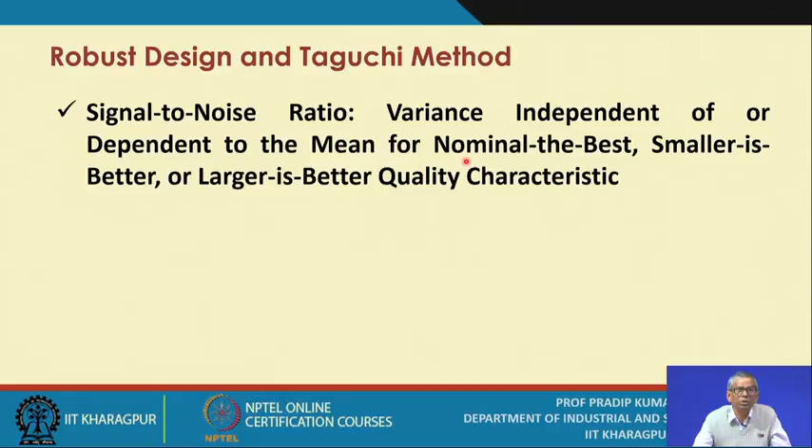Before I discuss signal to noise ratio, let me refer to tolerance design and tolerancing. If you remember, in the last lecture sessions we were referring to customer tolerance as well as manufacturing tolerance. Whenever we talk about the Taguchi method, there are three steps: the first is system design, the next is parameter design, and the last is tolerance design.

So we will just highlight certain important aspects related to tolerance design and tolerancing. It is important for the designer to establish the optimal values of a product's parameters and their tolerances, besides the product's performance, appearance and reliability.

In simple and plain terms, suppose you identify a parameter called, say, the spindle speed related to a machining operation. Given that particular component, its quality characteristics, its material properties, and all, I say that the target value of the spindle speed should be 500 RPM. But this is just a point estimate. So it is always better that you also specify the tolerances against the nominal value.

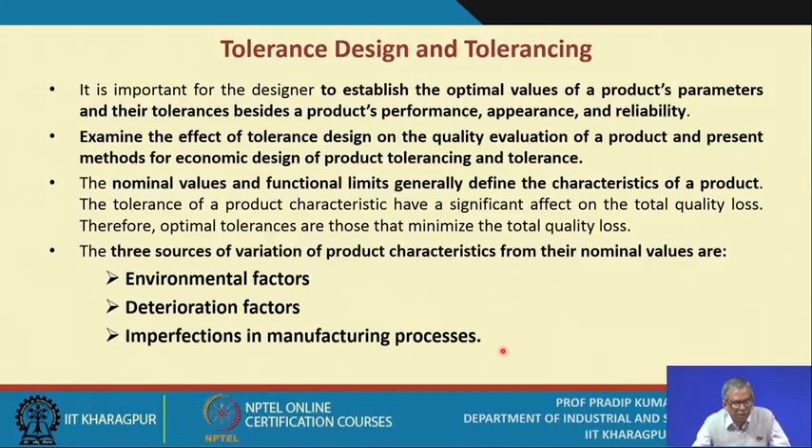Now, product designers address the first two causes of variation by considering the parameter design and the tolerance design. The production and manufacturing people address the third cause of variation, the variations due to manufacturing process imperfections. So the responsibility is assigned against these three kinds of sources of variations.

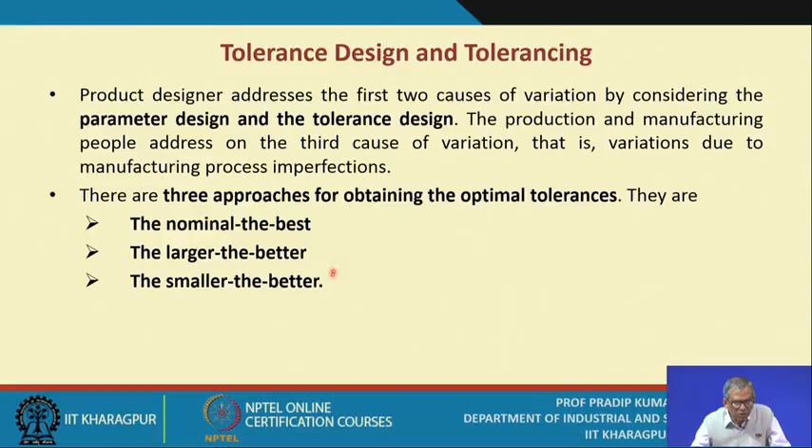Now, there are three approaches for obtaining the optimal tolerances against all these three types of quality characteristics. The first one is the nominal is the best.

In this type of tolerance, the nominal measurement of product characteristics such as dimensions and viscosity are examples. These are considered and the variation is reduced to a minimum.

The larger the better is applicable to product characteristics such as the hardness of materials, fuel efficiency and thermal properties of materials. These are three examples. The product designer and manufacturer aim for the larger value of the characteristics, as high as possible.

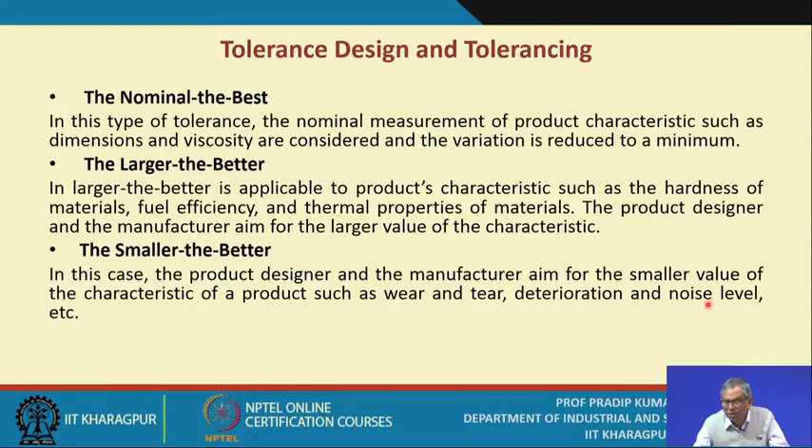Similarly, the third case, the smaller the better, the product designer and manufacturer aim for the smaller values of the characteristics of a product such as wear and tear, deterioration and noise level, etc. These are the examples.

When you deal with multiple components, this is a very special case. Here the objective is to confine the output characteristics of the product consisting of k components to the functional limit. As I have already told you during our discussions on reliability, most products have n number of components, and while you design a product, you first determine the number of components, the types of components.

And as well as the configuration. So supposing there are k number of components, the tolerance designed for each of these k components is required, since the tolerances of the components have a direct effect on the quality characteristics of the product or the processes.

So the desired characteristics of the product y with functional limit delta can be written as y equals to m0, that is the nominal value, plus c into x minus m. So m is the nominal value, x is the characteristics and c is a constant. So this is the equation.

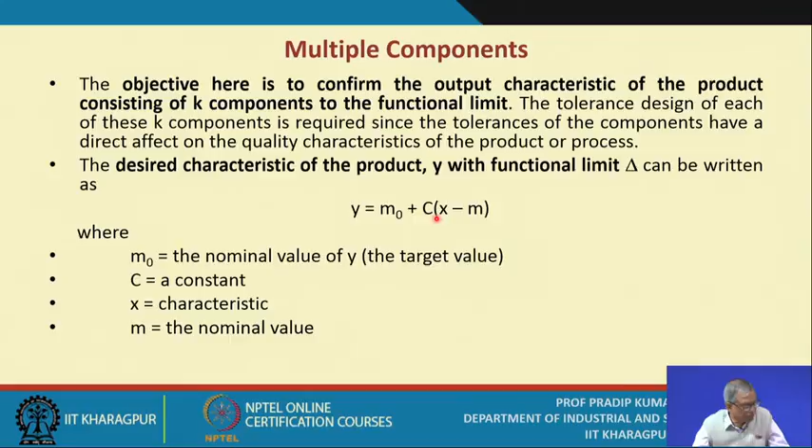Now the functional limits are m0 plus minus delta. So the loss function is computed like this. And the price of the component with characteristics x is equal to Ly. So this is basically the loss, meaning which price you are going to pay.

Therefore this loss equals A0, the proportionality constant, into c into x minus m square, and ultimately you get an expression for x like this. You can derive these expressions, no problem, which gives the optimal tolerance specifications for the component characteristics x.

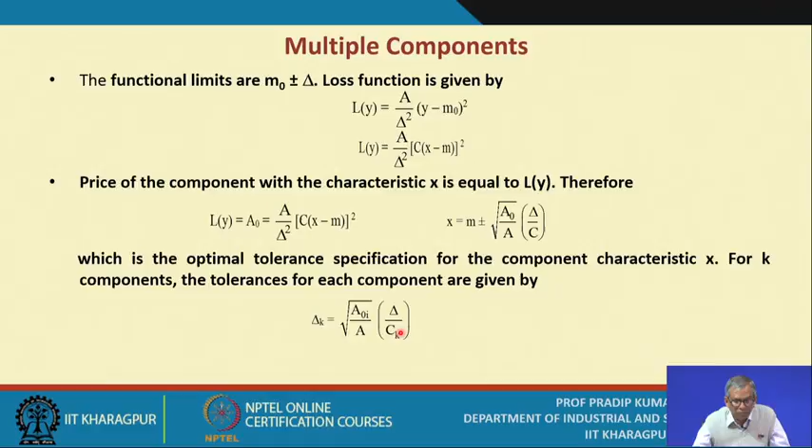For k components, the tolerances for each component are given by delta k equals to root over A0I divided by capital A, into capital delta by c k. So this is a generalized formula for capital delta k.

So when xi equals to mi plus delta i, assuming ci delta i represents the contribution to the displacement y caused by the quality characteristics xi, the overall tolerance delta can be computed as follows. You just follow these steps, the delta square expression is known to you, and you substitute all these values, and ultimately you simplify this expression.

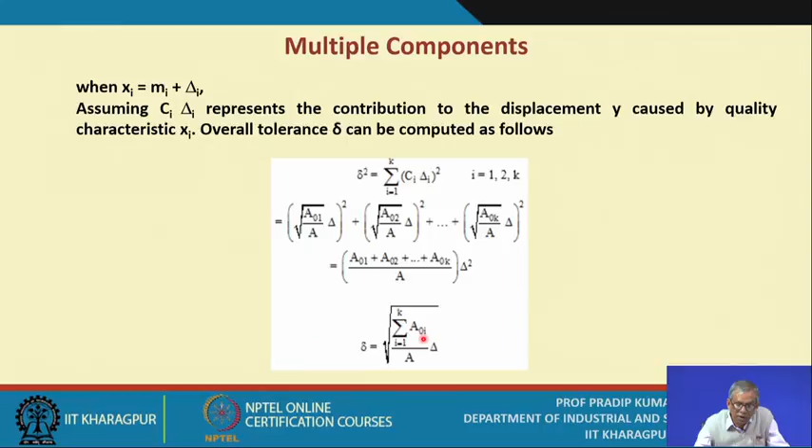And ultimately the expression for small delta is this one, that means root over sigma i equals 1 to k, A0i divided by capital A into capital delta.

So if you have multiple components, if sigma i equals 1 to k of A0i is less than or equal to A, then delta, obviously there could be different conditions. So small delta is less than or equal to capital delta.

This is basically when you refer to the manufacturing tolerance, so you make sure that the small delta is significantly less than the capital delta.

Then small delta equals capital delta. So what is the value of x? X is m plus or minus this one, into capital delta divided by small c. Now this expression you can use to determine the tolerance of each component.

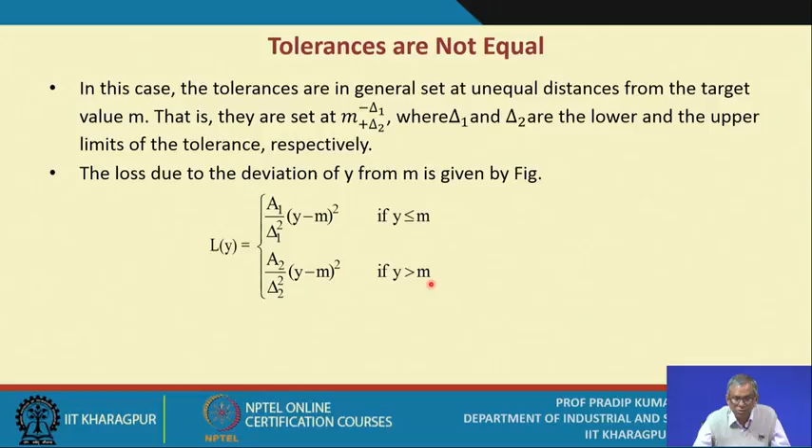That means the asymmetric case, where y is less than or equal to m, and y is greater than m, which we have already computed. This is the case where loss tolerances are not equal. Several examples have been put forward. When these values are greater than m, you will find there's a loss, but the loss is less. Whereas if the actual value is less than m, the loss is very high, significantly high. So this we have explained.

So when n observations are taken, the expected loss L is obtained as this expression. That means the entire loss is grouped under two categories: the loss when the value is greater than m, and the loss you incur when the value is less than m. So this is the final expression you have.

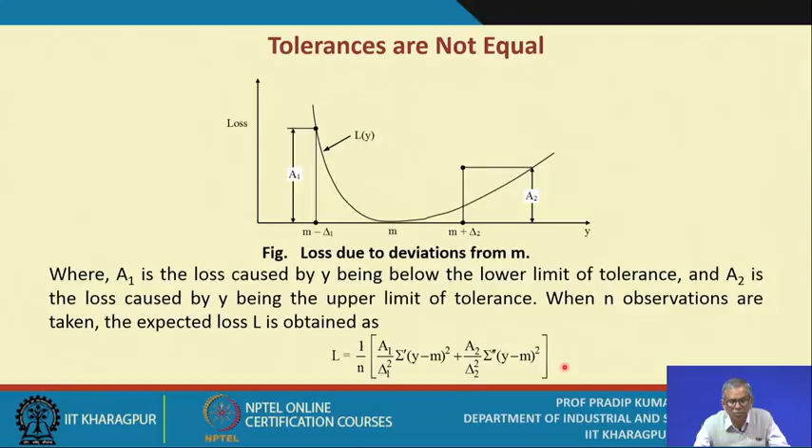Now let us talk about a particular ratio called signal to noise ratio. As you know, when you determine the optimal parameters of a process, and the process is used to produce a component, what is important is that you set the parameter values in such a way that the performance of the product is held at the maximum level. Now the question is, how do you specify or determine the performance? What Genichi Taguchi has pointed out is that the performance of a product or a process must be measured with a ratio called signal to noise ratio.

He says that the performance will have two components: one is the desirable component, and the second is the undesirable component, and both will be occurring. The desirable component is measured with the signal, and the undesirable component is measured with the noise. You cannot come across a situation where you get only desirable components, or it is least likely you will get only undesirable components. So the signal is the desirable one and the noise is the undesirable one. What he suggests is that performance must be measured with this ratio called signal to noise ratio. This is the basic idea behind proposing signal to noise ratio as the performance measure.

So the quality of a product or a process is greatly affected by two classes of input parameters. One is definitely the design factors. That's why when we talk about offline quality control, we are dealing with the design factors. Then there is another factor called disturbance factors, meaning there are many external factors.

These are uncontrollable noise factors, and you have to get the performance of the product. Definitely you try to achieve the best possible performance, but the product is running in a given environment, and that environment may have many types of factors on which you don't have any control. So directly or indirectly, these factors are affecting the performance of the product. So you need to consider the design factors as well as the disturbance factors.

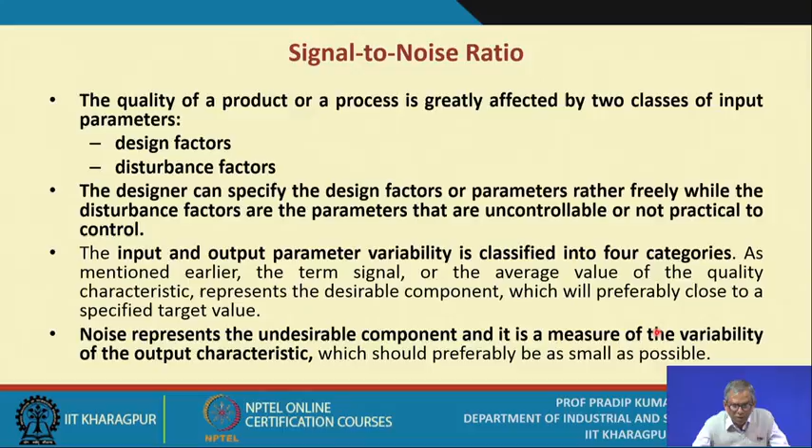Many a time, when you refer to a particular distribution, there is a variability. We say that this variability is due to system-related or uncontrollable noise factors, like say these are due to common causes. So what you need to do in order to improve the performance of a product or process is maximize the value of signal, and simultaneously minimize the value of noise.

So the four categories of variability of the input and output parameters are: when you talk about input variability, in order to improve the performance of the product, you need to consider input parameters as well as input variables, and you must know the sources of variation of the input variables.

The first issue is the tolerances. Tolerances are defined as the limit at which some economically measurable action is taken. Tolerances are the normal variability in design factors. Either there could be a loose tolerance or a tight tolerance, but the tolerance does exist. The customer tolerance corresponds to the point at which a significant number of customers take economic action because of off-target performance, as already referred to.

Now what is the inner noise? Inner noise is a result of variation due to deterioration of parts and materials. This is happening within the manufacturing system. Examples include wear out of parts due to friction, and an increase in resistance of resistors with age.

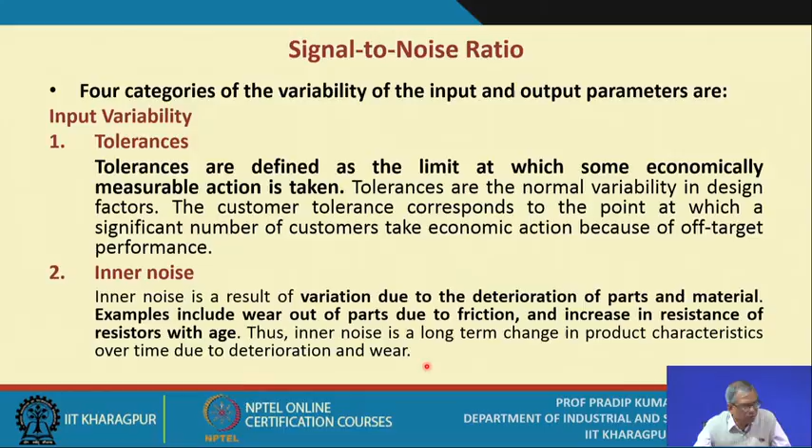Now, as far as output variability is concerned, the first one is the variational noise - the short-term unit-to-unit variation due to the manufacturing process. I have already pointed out what you mean by unit-to-unit variation. Both units are produced with the same set of specifications, but can you just say that both units are identical? You cannot be. There will be, even if they are closely identical, they cannot be 100% identical. So this is referred to as the unit-to-unit variation.

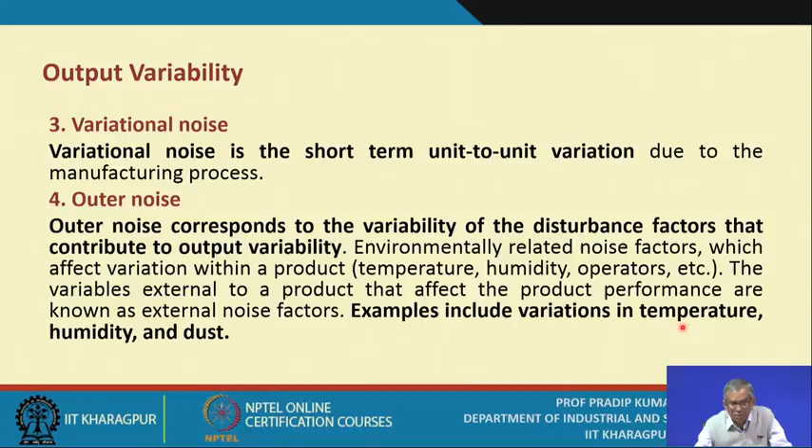So this is one, and the second one is the outer noise. Outer noise corresponds to the variability of the disturbance factors that contribute to the output variability, so you need to identify the sources of this outer noise - environmentally related noise factors which affect variation within a product, like temperature, humidity, operators, etc. The variables external to a product that affect the product performance are known as external noise factors. Examples include variations in temperature, humidity and dust.

Taguchi has combined these two components, signal and noise, into one measure known as the signal-to-noise ratio, as I have already pointed out. The signal-to-noise metric is designed to be used to optimize the robustness of a product or process - that means make sure that even if there is existence of external noise factors, the performance of the product as measured by signal-to-noise ratio is not significantly affected.

The performance measure combines both parameters, the mean and the variation around the mean - that is essentially the standard deviation or the variance. Hence, when the performance measure is maximized, the expected loss will be minimized. Taguchi uses the signal-to-noise ratio Sn, that is the notation we use, S by n, as the objective function to be optimized.

Here we consider three situations, again there are three quality characteristics. What you need to do is provide expressions for the signal-to-noise ratio for each of these three cases.

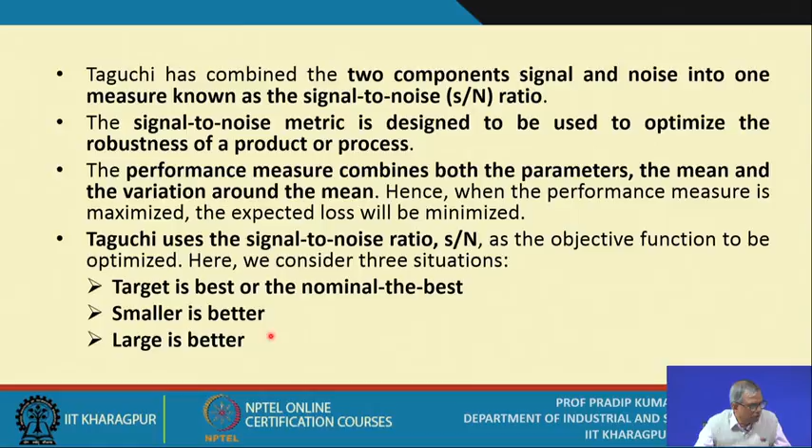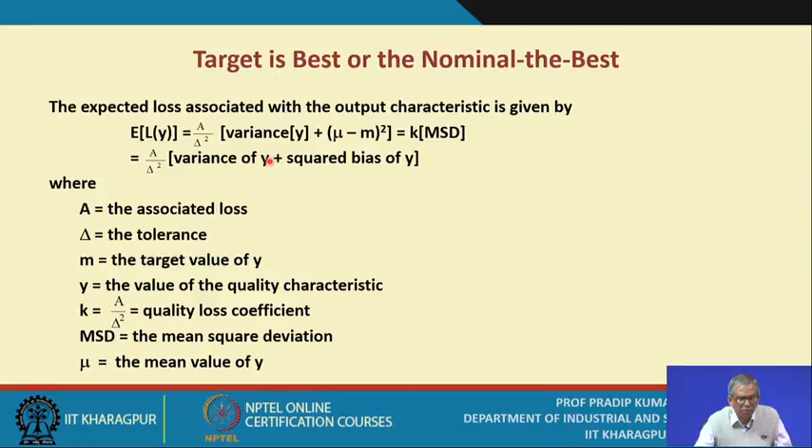When the target is the best, nominal is the best, you know this is the expected loss, that is K into MSD. We have already derived these expressions: this is the squared bias of y, this is the variance of y, and this is the expression for the proportionality constant. It is desirable for the output characteristic to be on target while the variance is as small as possible. The mean square deviation MSD for the nominal-is-best case can be written as this one.

There are two different nominal-is-the-best cases that require modifying the MSDs in different ways to obtain the form most likely to be independent of the adjustment. So there are two different forms, two different assumptions.

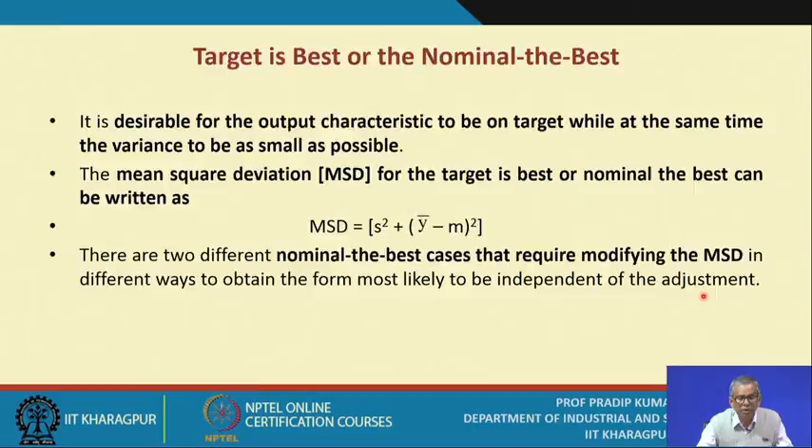The first assumption is that the variance is independent of the mean. This is the first case: you have collected a set of data related to a particular quality characteristic, computed its mean and variance, and then assumed that the variance is independent of the mean.

Response values are continuous and can take on either positive or negative values, and the target can be 0. Typical examples are temperature controller errors around the nominal value and the offset voltage for a power supply. Please go through all these examples; there are several I have provided.

In this situation, the performance measure which reduces the variance of the output is given by xi equals minus log variance of y. Why do you use the log scale? Because for very low values as well as very large values, the variation is not known, so using the log scale all those values can be accommodated on the same scale.

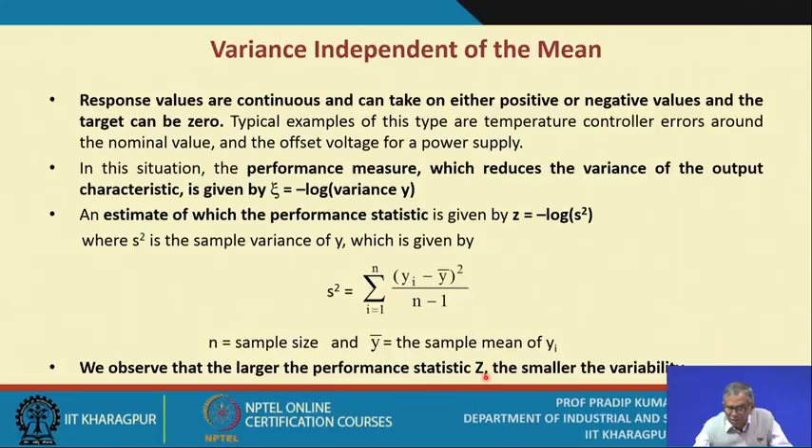An estimate of the performance statistic, this general expression, estimates xi as z equals minus log s squared, where s squared is the sample variance of y. So you get a sample and compute the sample variance like this. We observe that the larger the performance statistic z, the smaller the variability.

When the variance is related to the mean, which might happen in the majority of cases, at least 60 to 70 percent, you find this assumption holds. The standard deviation of the output characteristic is assumed linearly proportional to the mean, and the bias can be reduced independently of the coefficient of variation. You know the coefficient of variation is defined as the ratio of the standard deviation to the mean; I presume you have already studied this.

The response values in this type are continuous and non-negative, ranging from 0 to infinity. When the mean response is 0, the target value is non-zero and the variance is 0. Some examples of this nominal-is-best case are image density and the dimension of an elastomer, that is, variation due to temperature and humidity.

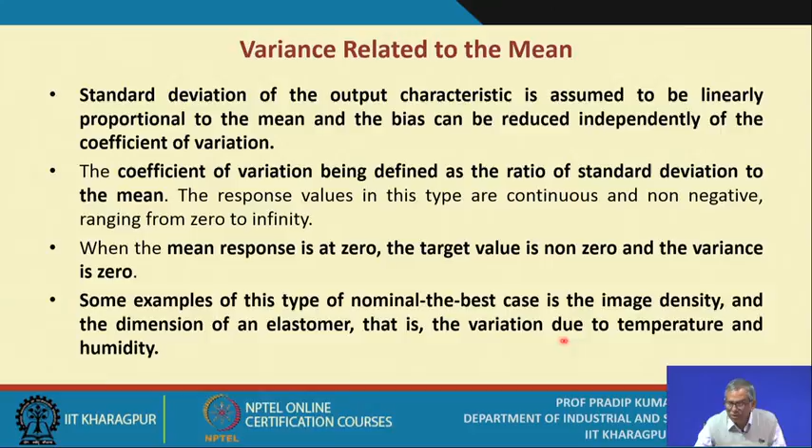So here, how do you calculate the SN ratio? It is mu squared by sigma squared. The corresponding performance statistic, when you deal with a sample, is z equals 10 times log of y-bar squared divided by the sample standard deviation squared, that is, the sample variance.

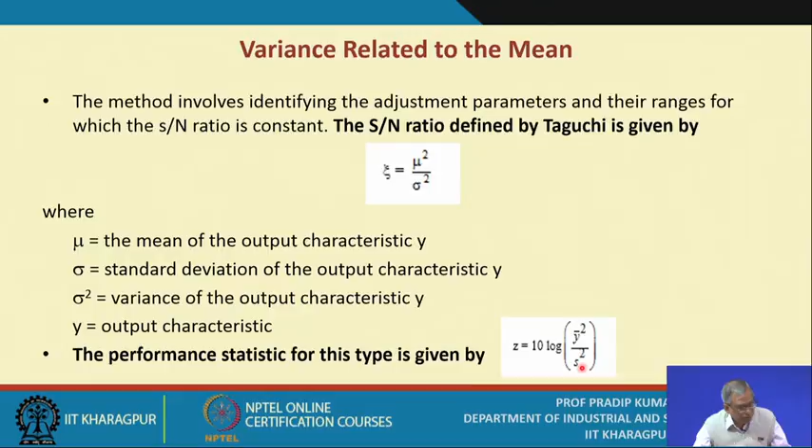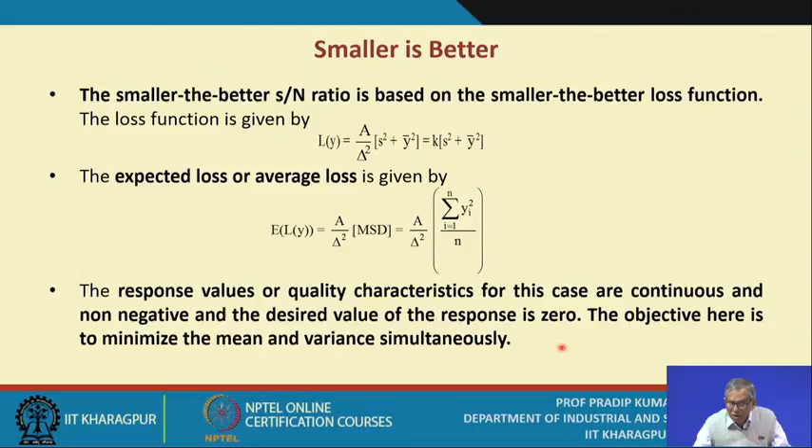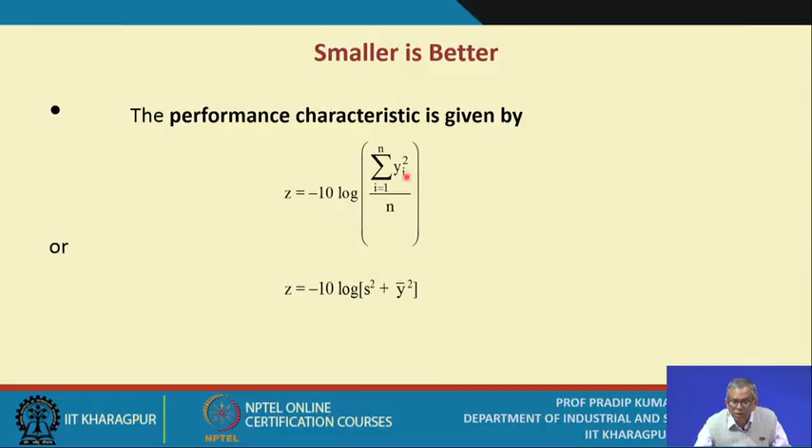In the smaller-the-better case, you have these expressions, and the corresponding expected value is also derived already. For the smaller-the-better case, the performance characteristic is given by the z statistic, that is, minus 10 log of sigma yi squared divided by n. This is a simplified expression for small z.

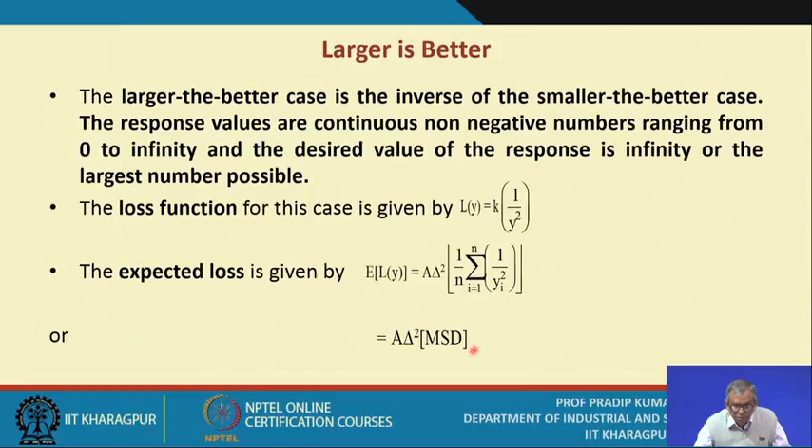So the objective here is to find the parameter settings that will maximize the performance statistics.

Two design factors of importance are: control factors, which affect mainly the SN ratio but not the mean—that is most important in fact—and signal factors, which affect mainly the mean response of the performance characteristics.

So this point is to be noted: control factors are first used to minimize the output variability, and there could be some engineering solution for this, and then the signal factors are used to shift the mean to the desired target value.

As we have pointed out, even in control charting, we say first you concentrate on the variability. If you can control the variability, the necessary condition is satisfied. Next you try to shift the value of mean. Controlling variability is often difficult—in many cases you need to change the design altogether—whereas shifting the mean may not be as problematic in the majority of cases.

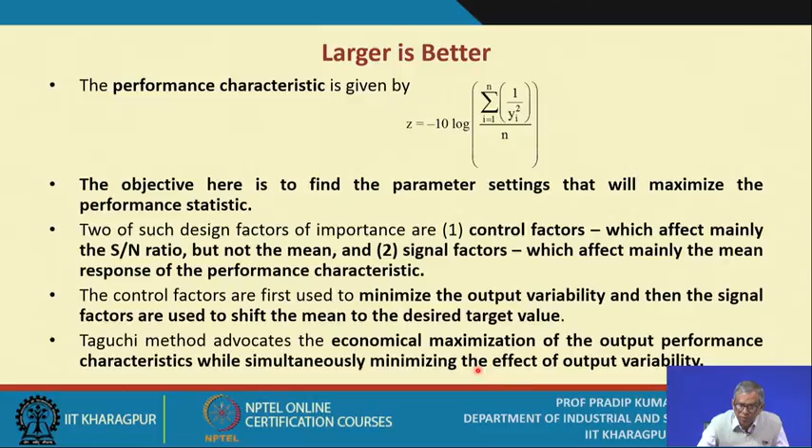Taguchi method advocates the economical maximization of output performance characteristics while simultaneously minimizing the effect of output variability. So that is very important.

Here I will give one example, and the solution is also given. My suggestion is I will read out this example, and you follow the steps for how you determine the performance measure.

In order to determine which injection molding machine has the best performance with respect to part shrinkage, a full factorial experiment based on 4 different machines and 3 noise factors is used. We have already discussed experimental design in the previous week, and one particular experimental design is the full factorial experiment, so we are referring to that.

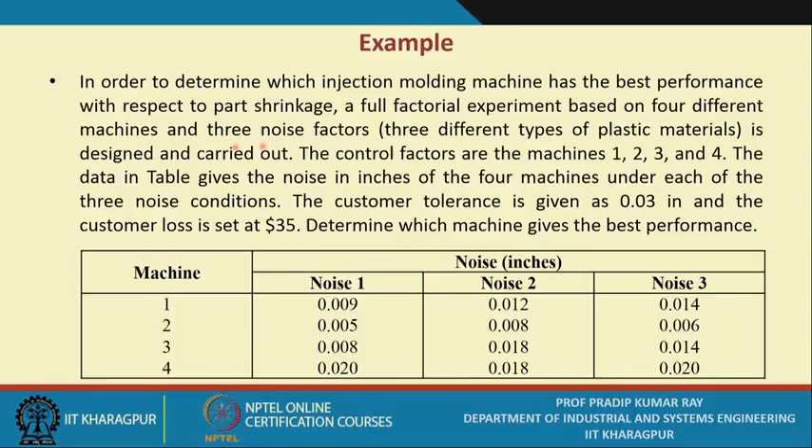So we have 4 different machines and 3 noise factors, with 3 different types of plastic materials designed and carried out. The control factors are the machines 1, 2, 3 and 4. The data in the table gives the noise in inches of the 4 machines under each of the 3 noise conditions. The customer tolerance is given as 0.03 inch, and the customer loss is set at $35. Determine which machine gives the best performance.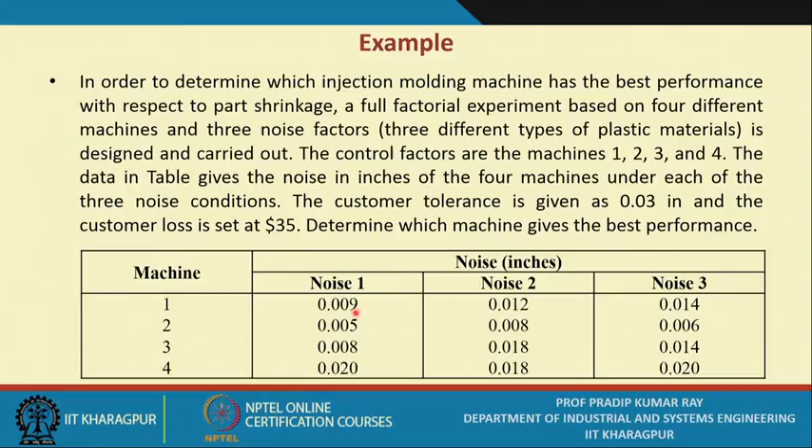So you have 4 machines, with corresponding noise values given in the table. So how do you get the solution?

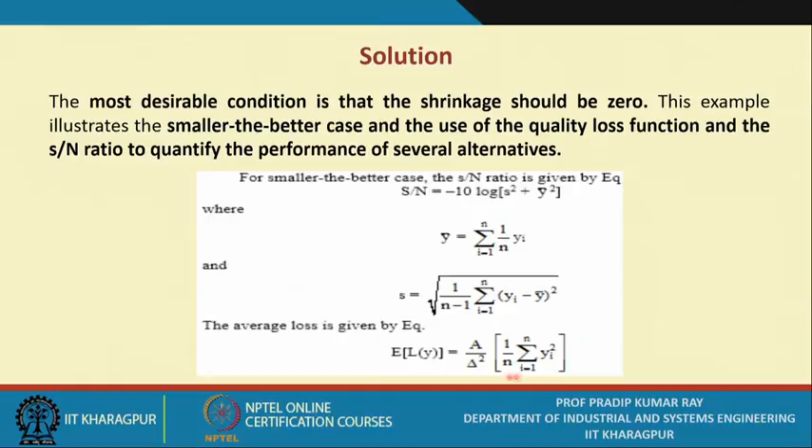For the smaller-is-better case, you compute the SN ratio with this formula. With the given data, you calculate y-bar, and similarly you calculate the sample standard deviation using this formula, and ultimately you compute the average loss. This formula has already been explained, and for each machine with noise 1, noise 2, noise 3, you compute the mean, the standard deviation, and the loss. Using the loss formula you compute the loss, and you also compute the SN ratio.

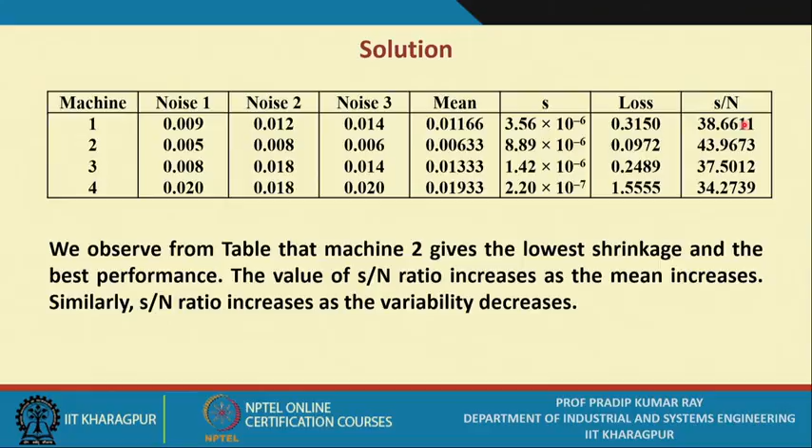You repeat these computational steps for the other 3 machines—machine 2, machine 3 and machine 4—and if you create a table, you observe that machine 2 gives the lowest shrinkage and the best performance. If you look at all these values, it is giving the best performance.

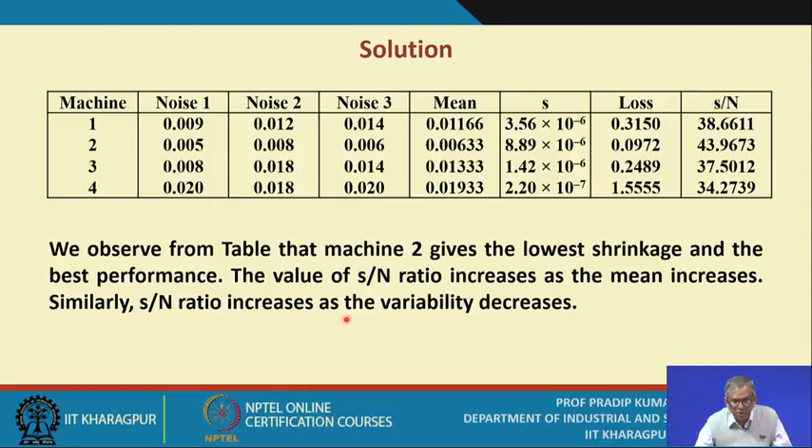The value of SN ratio increases as the mean increases—this is the observation—and similarly the signal to noise ratio increases as the variability decreases.

So here we conclude our discussions on robust design and Taguchi method. We have covered almost all the important aspects, and I suggest that you go through the numerical examples—if you do, your understanding will be very high. Thank you.